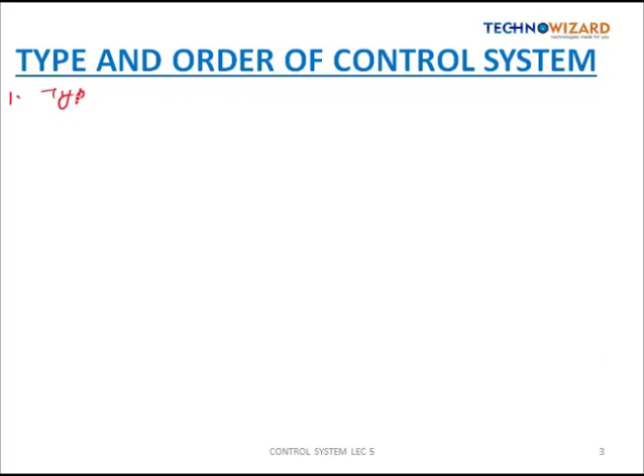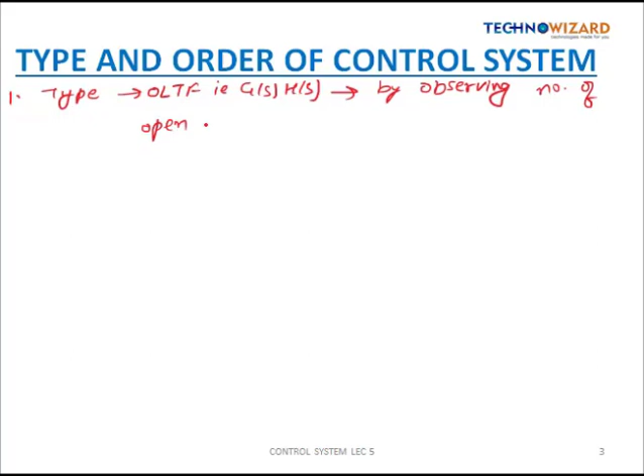The type of the control system is obtained from the open loop transfer function, that is G(s) into H(s), by observing the number of open loop poles at the origin. Okay, so by observing the number of open loop poles at the origin.

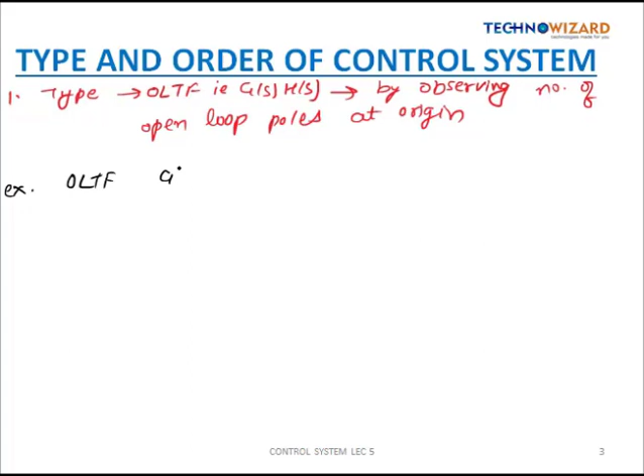Now if we understand this concept by using an example, suppose the open loop transfer function is G(s) into H(s). The transfer function is in this form, that is K into (1 plus Ta s), represented in time constant form, divided by s to the power p into (1 plus T1 s).

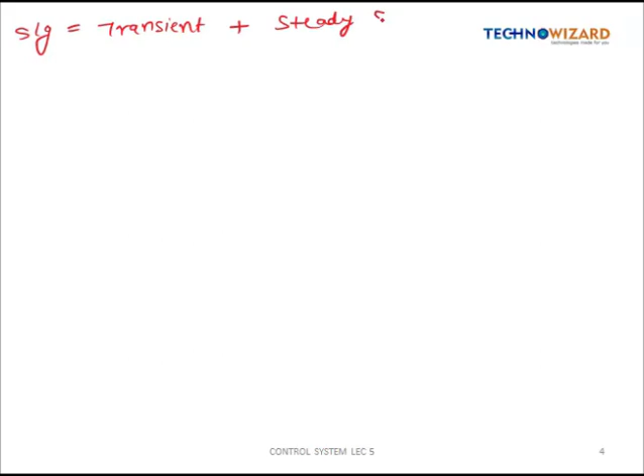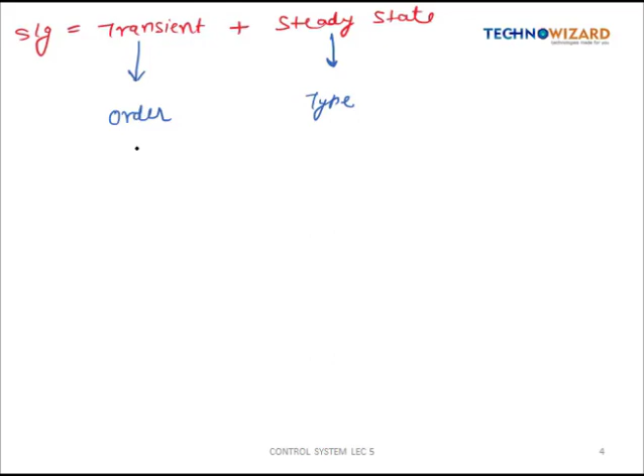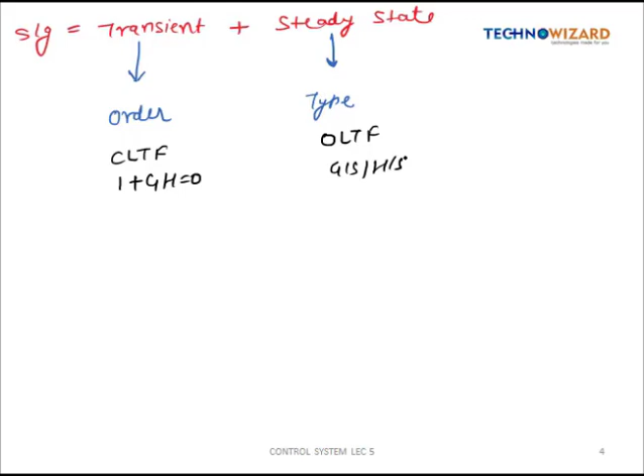By using the closed loop transfer function, that is the highest power of the characteristic equation, which is given by 1 plus GH is equal to 0. And how to calculate the type? Type is obtained from the open loop transfer function, which is G(s) into H(s). Generally H(s) value is 1, that is, we will consider a unity feedback system.

Now let's understand with a question: what are the order and the type of the closed loop system for the plant transfer function G(s) equal to K divided by s square into (1 plus Ts) with unity feedback? It means plant transfer function G(s) is given and unity feedback is given, so H(s) value is 1. So first we will calculate the order.

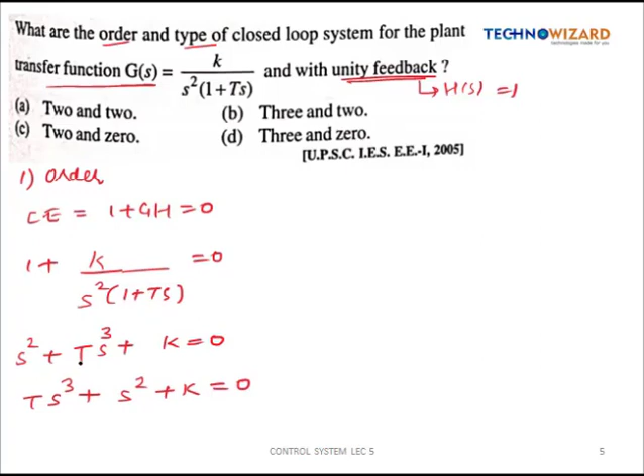Order is obtained from the characteristic equation, which is given by 1 plus GH is equal to 0, and the highest power of s will be our order. So this will be 1 plus K divided by s square into (1 plus Ts) is equal to 0. Now let us take the LCM: s square plus Ts cube plus K is equal to 0. Let us rearrange: T s cube plus s square plus K is equal to 0. So here the highest power of s is 3. This implies that the order is 3.

Now we have to calculate the type. Type is obtained from the open loop transfer function, which is given by G(s) into H(s).

H of s की value 1 है, so G of s is given by K divided by s square into 1 plus Ts. So here two poles are lying at the origin because यहाँ पे इसकी power 2 है, so two poles at origin. Okay, so this implies that type of the system is 2. So this is matching with the option 3 and 2 is option B.

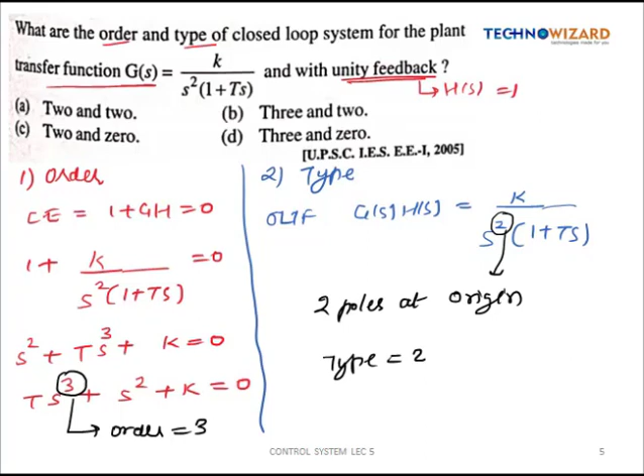Okay, now let us see the expression for the steady state error. So we know that block diagram की help से जब हमने represent किया था, तो steady state error, I am denoting it with E of s, that is error is given by the difference between the input and output, that is R of s minus B of s. Okay, so now E of s is equal to R of s. So C of s को हम लिख सकते हैं, so this will be B of s. Okay, ब्लॉक डायग्राम में जब हमने यहाँ पे बनाया था तो इनपुट था R of s एंड फीडबैक से जो आ रहा था वो B of s था. ओके, so this will be B of s.

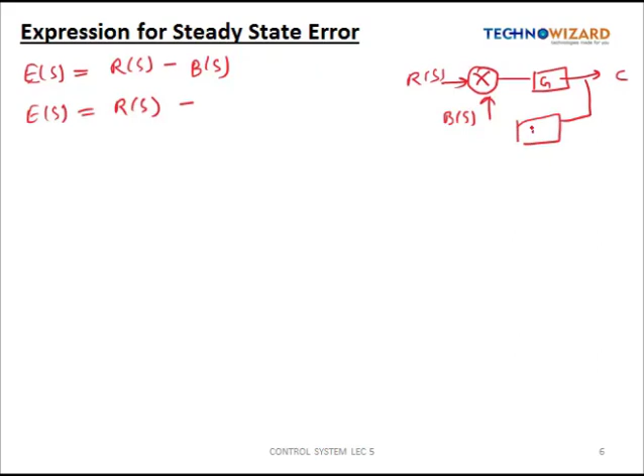Now let me draw. So here we have G of s and output is C of s, and in the feedback we have H of s. Okay, so here B of s will be equal to C of s into H of s. So E of s is equal to R of s minus B of s, so this B of s will be equal to E of s into G of s into H of s. So now let us take this E of s term on the left hand side and E of s को हम common लेंगे. ठीक है, तो E of s को common ले, it will give us 1 plus G of s into H of s is equal to R of s.

So error का जो expression है is given by R of s, that is input, divided by 1 plus G of s into H of s. So this is the expression for the steady state error. Okay, now from here we can conclude that steady state error is depending on, first, R of s. R of s indicate करता है type of the input. Okay, so type of input पे depend करता है. Also in the denominator it is 1 plus G of s into H of s. So it depend करता है type of the system पे. Okay.

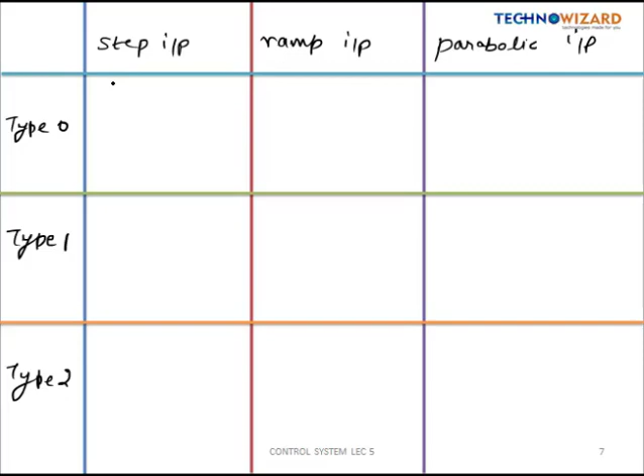So steady state error is given by A by 1 plus Kp, where A is the amplitude of the input and Kp is the position error constant. Okay, so let me write here. So A is the amplitude and Kp is the position error constant.

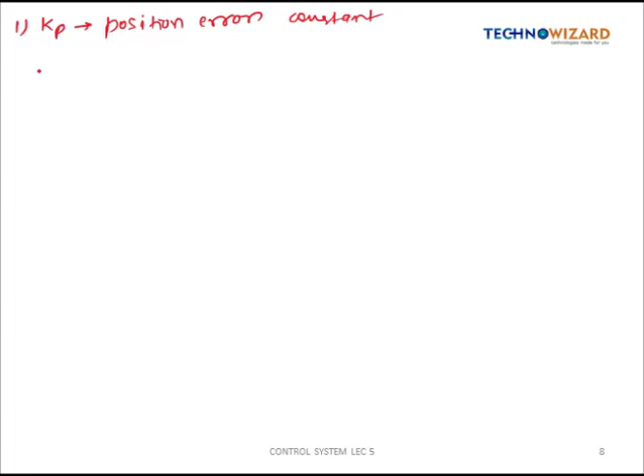ka is the acceleration error constant and a is the amplitude of input. So now let us see the expression for the kp. So kp is position error constant, which is given by kp is equal to limit s tends to 0 G(s) into H(s). Okay, next is kv.

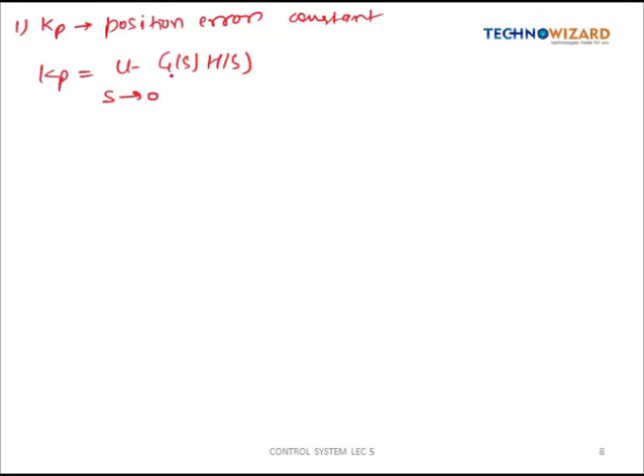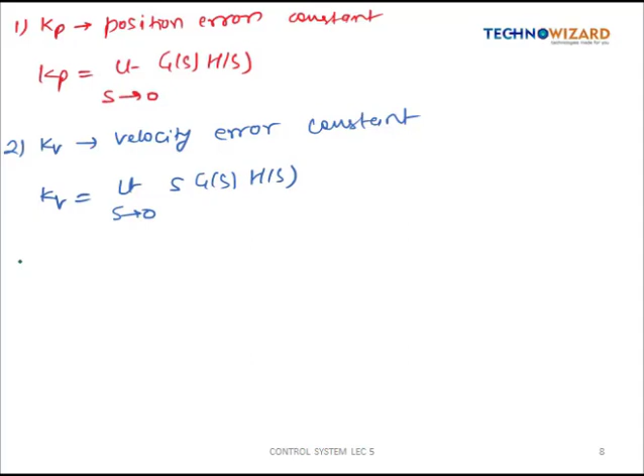kv is the velocity error constant, which is given by kv is equal to limit s tends to 0 s into G(s) into H(s). Next, ka is acceleration error constant, which is given by ka is equal to limit s tends to 0 s square G(s) into H(s).

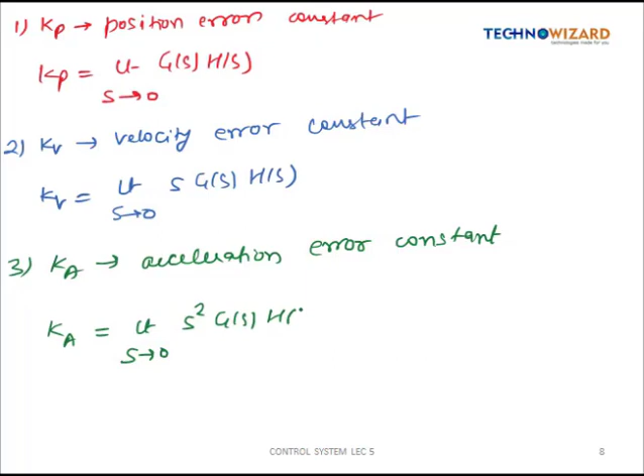So now let us take a question and understand this concept. The steady state error is dash for an input of r(t) is equal to 2 plus 3t plus 4t square for the given system.

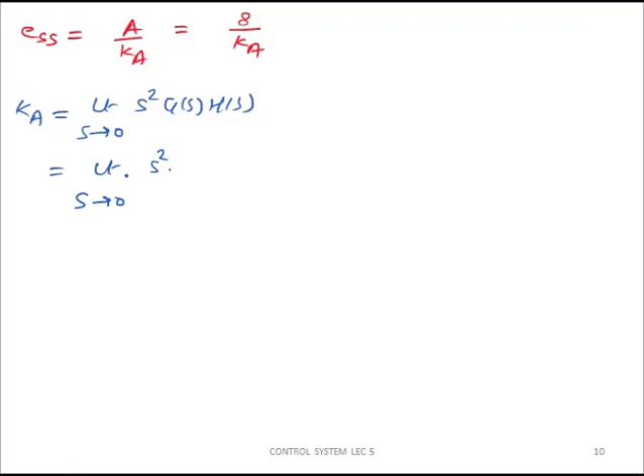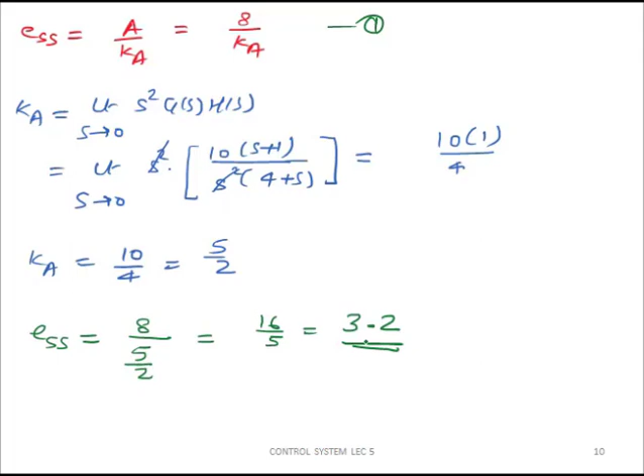So G(s) value is 10 into s plus 1 divided by s square into 4 plus s, and H(s) value is 1, so s square will get cancelled out. Now if we substitute s is equal to 0, this will be equal to 10 into 1 divided by 4. So ka we are getting as 10 by 4, which is equal to 5 by 2. So let us substitute this value in equation 1. So steady state error will be given by 8 by ka, ka value is 5 by 2, which is equal to 16 by 5, which is equal to 3.2. Okay, so the answer is 3.2.